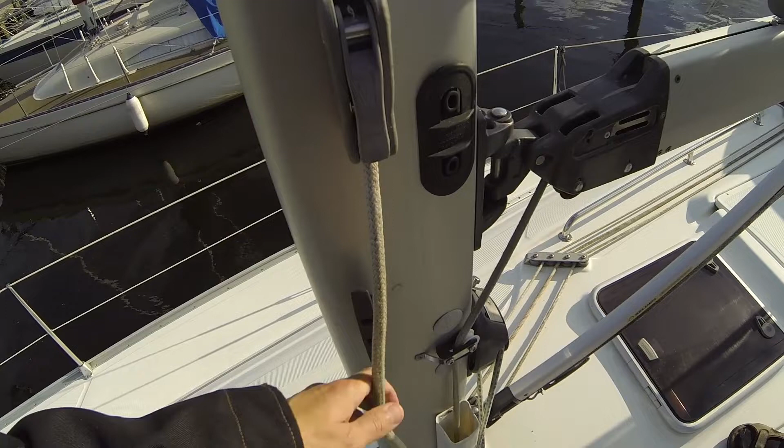I am preparing to step the mast, and I will also change the motor oil. The reason for the oil change is because it's best to have new oil standing in the engine during winter, to ensure the best protection for the engine.

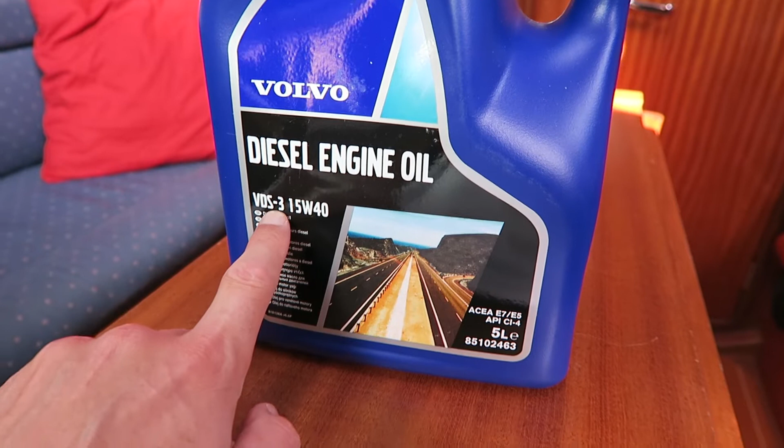I have bought some original Volvo Penta oil, and as you can see, it is VDS 3 certified. It's 15W40 mineral oil, but the original oil has some approvals that make it the best to use in the Volvo Penta engine.

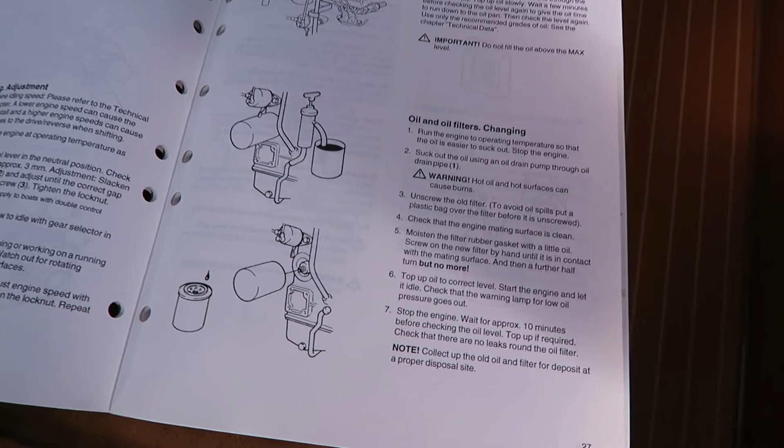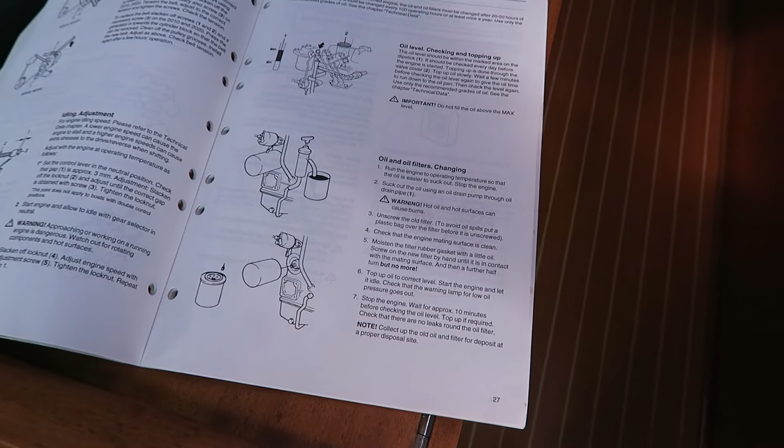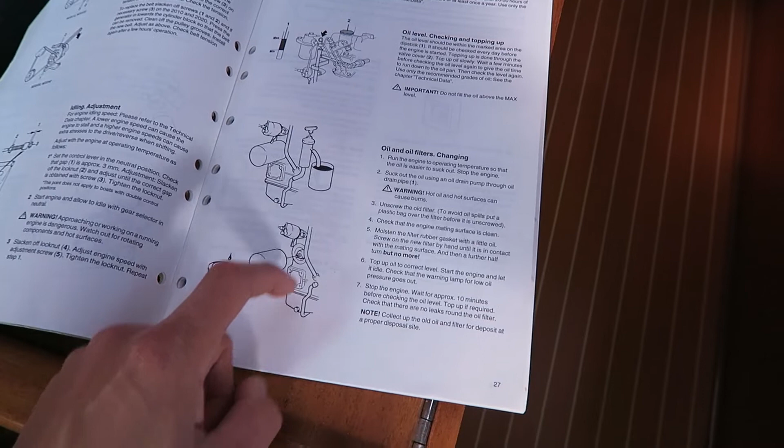As you can see, we have instructions in the manual. I must first start the engine and get it warm, then suck out the oil, unscrew the oil filter, screw on a new oil filter, and then put new oil into the engine.

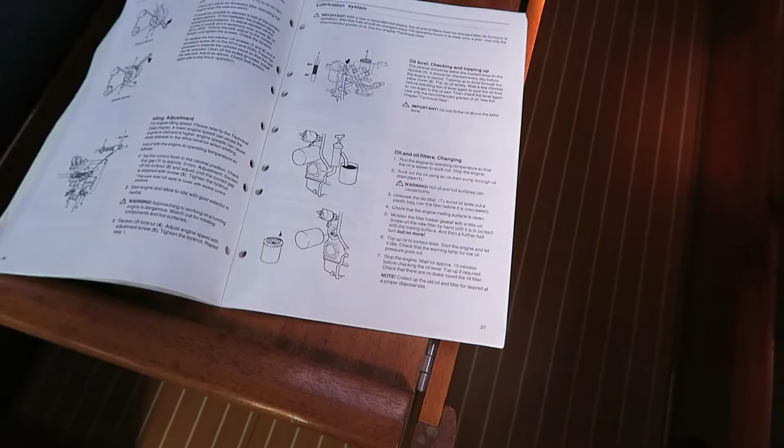I can show you the oil level here with the dipstick, how much the old owner has put on. The level must be between these points, but normally people fill on way too much oil, which can result in a leak since engines must not be overfilled. As you can see, it's maybe a bit too much, over the maximum point, so I will ensure the engine doesn't get too much oil.

I will then start up the engine.

The engine must run for half an hour or so to ensure it is warm, so it is easier to remove all the old oil. In the meantime, I will use my time doing something else.

When the engine gets hot, the cooling fluid in the secondary system will expand, and it seems like there's more cooling fluid in the system. It's only because it's expanding, and when the engine cools again, the fluid will shrink back. It is totally normal.

The engine has now run for about half an hour, and as you can see, there is more cooling fluid in the system because the engine is hot.

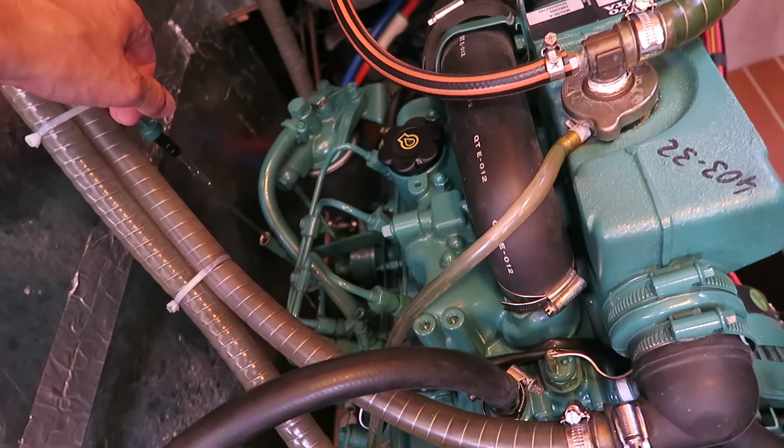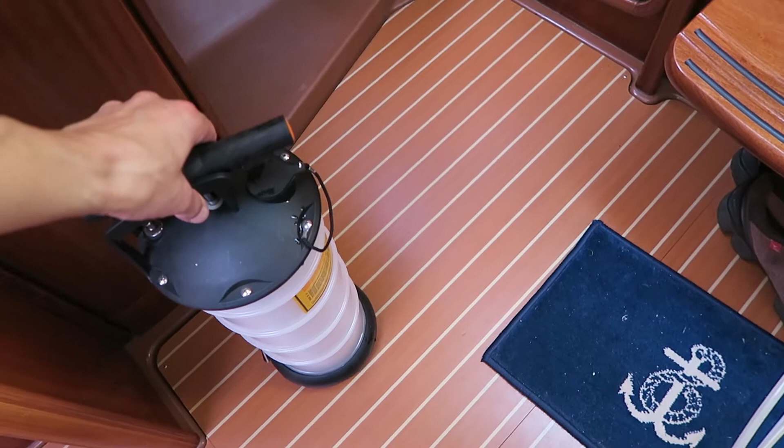The first thing I will do is remove the dipstick. You must remove the oil through the dipstick hole. I have this oil sucking device I can use to suck out oil, with some sucking tubes.

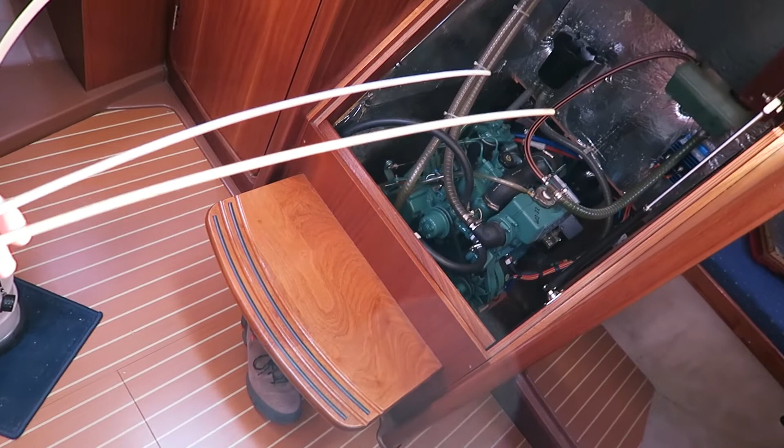The first sucking pipe is mounted here, and I have two more pipes. I think I will use the biggest pipe, as I think it will fit into the system. I'll show you, I'll put it in here if I can.

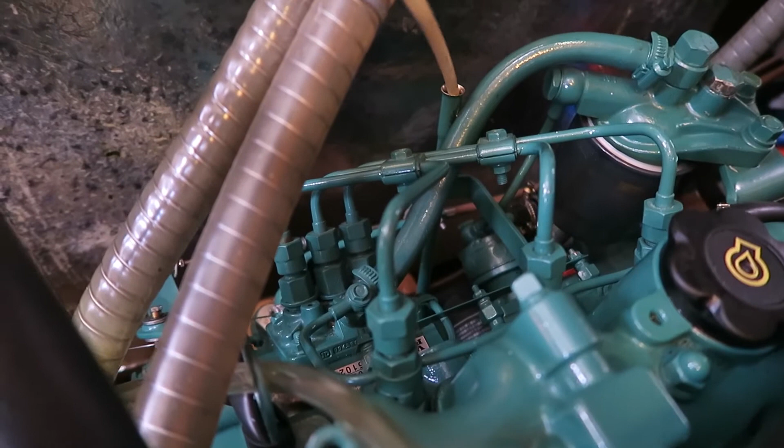The big pipe doesn't fit, so I will try the smaller one. It fits better. It must go all the way to the bottom of the engine, so you can suck out the dirty oil from the bottom.

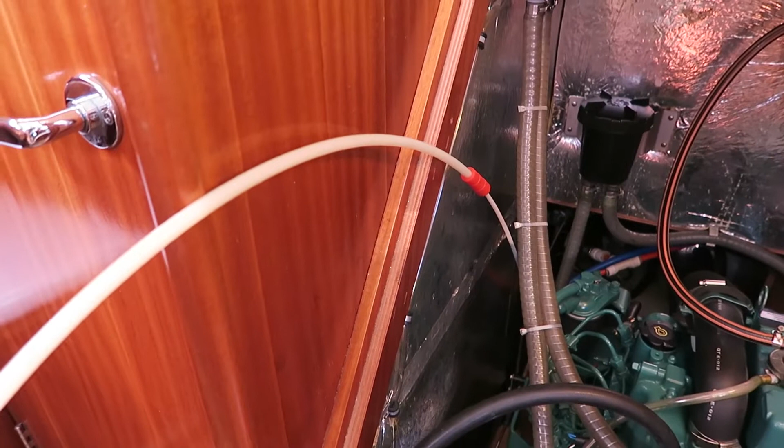The pipe is now mounted, and I will try to pump to see if anything happens. Yeah, and the oil is running out. You must first pump some pressure, and then it will suck and suck until it's almost finished.

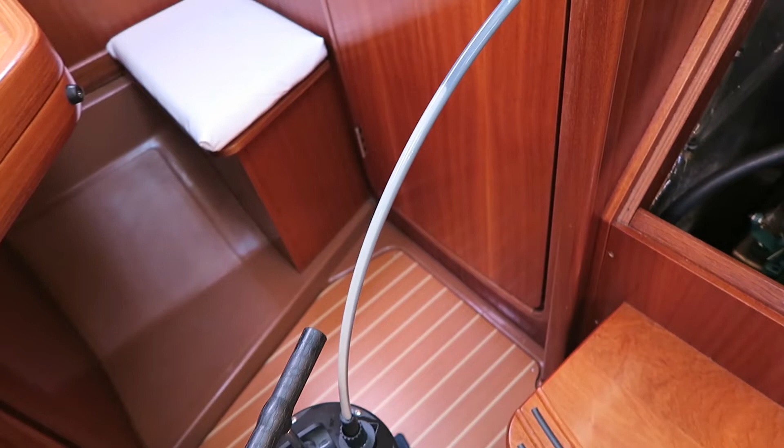Sometimes you can hit the bottom, so you must lift it up a bit so it can suck out the oil. When it's totally flat on the bottom, you can't get any oil out. As you can hear, the hot oil is running into this oil sucker.

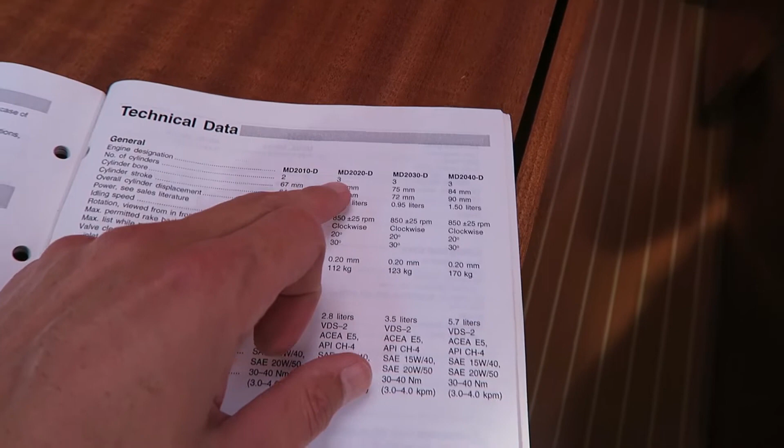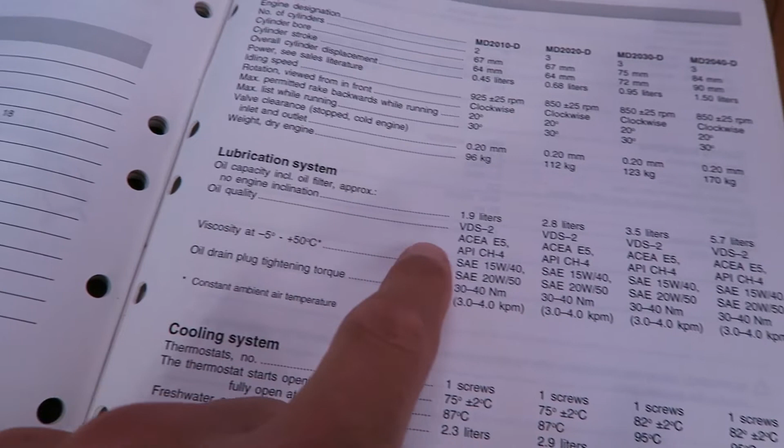My engine is a Volvo Penta MD2020. There will be 2.8 liters of oil in the engine, and as you can see here, we have the oil quality specification VDS2.

You can see as this thing is sucking out the oil, there's approximately 1 liter with this here.

I use this Fram oil filter for my engine, the PH2951. It is almost better than the original Volvo filter, but it's only half the price or so.

I then also changed the fine fuel filter and the pre-filter, which is the first filter from the fuel tank. You first get the fuel through this, and once it is filtered, it goes to the fine filter.

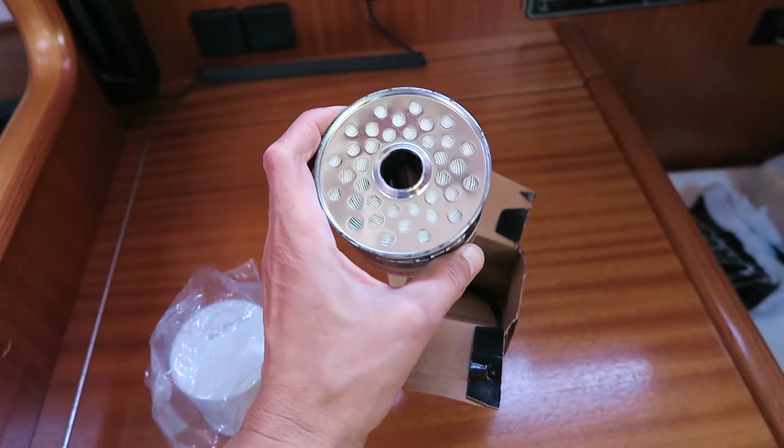As you can see, it is a Delphi 296, so I hope it's okay. But it's from the previous owner of the boat, so I think it is okay.

The oil is now out of the engine. It is almost the right amount, but I can't get any more oil out of this pipe, so I think it is okay.

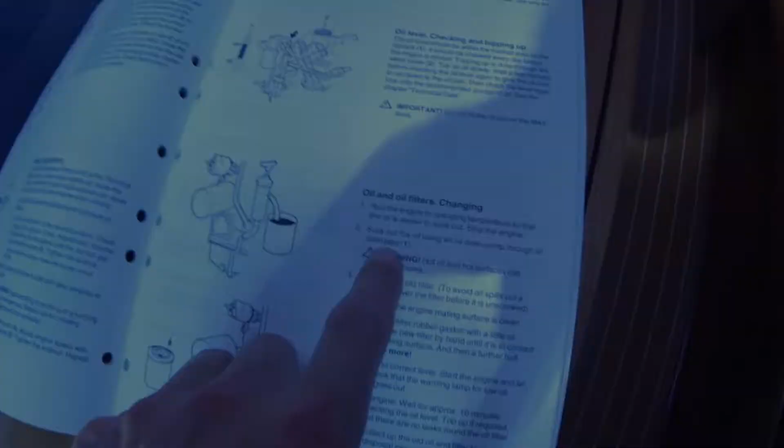Suck out the oil using an oil drain pump through oil drain pipe 1.

I have removed the cap from the drain pipe, as you can see down there. I think it's the right place to suck out the oil. In the old days I always sucked the oil out through the dipstick pipe, but on this Volvo Penta you must suck it out in this area down here.

It is now day number 2 in my little oil changing project. Yesterday I had a little problem with the sucking tube. The issue was that my system couldn't suck out the oil using the other type of sucking tube.

As you can see here, I have connected it to the black sucking tube that goes to the bottom, and the right way to suck out the oil is through this tube. Today I will try to see if it's working.